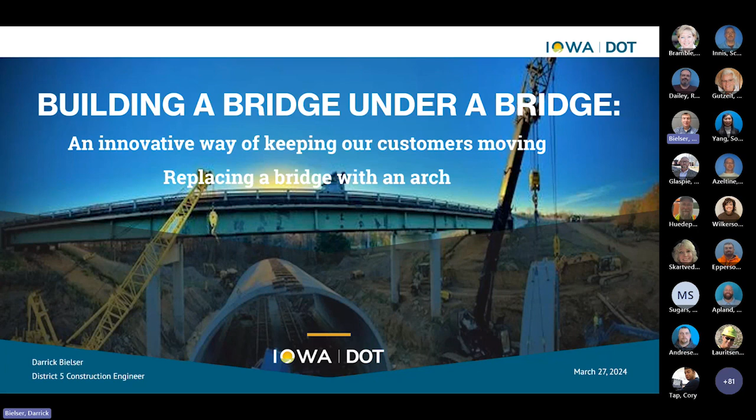Hello, I am Darrick Bielser, and I'm here to talk to you today about building a bridge under a bridge, an innovative way of keeping our customers moving.

Innovation in construction: while maintaining safety, innovation can increase mobility in order to keep our customers moving. I'm going to talk to you about a bridge replacement project using an arch on Iowa 1 over Little Lick Creek in Van Buren County. Van Buren County is located in southeast Iowa, just south of the Fairfield District Office. Today's agenda will include concept, design, fabrication, construction, leaving time for questions.

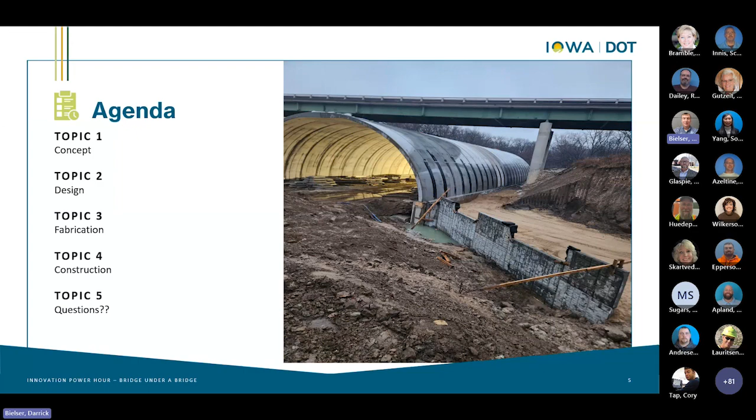Iowa 1 is classified as an area development route with a C maintenance service level, 24-foot wide PCC pavement with granular shoulders. An HMA resurfacing project with paved shoulders was completed in 2004. The 2022 AADT was 2,500 vehicles per day with 9% truck traffic.

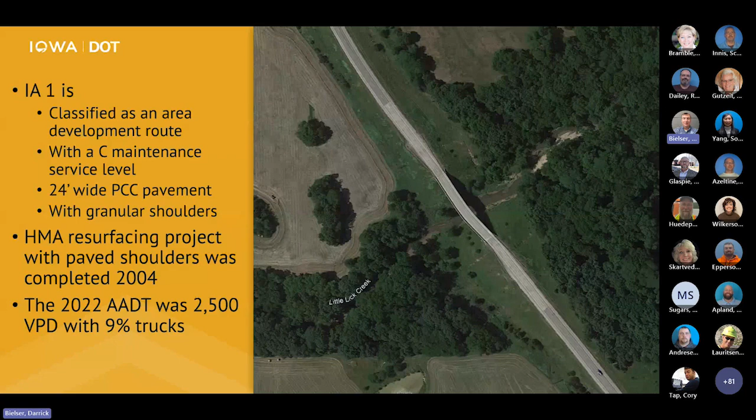The crash report from January 1st, 2014 to December 31st of 2023 indicated there have been 3 crashes: 0 fatalities, 0 personal injury crashes, 1 animal hit, 1 operating vehicle in a reckless manner, and 1 vehicle ran off the road to the right.

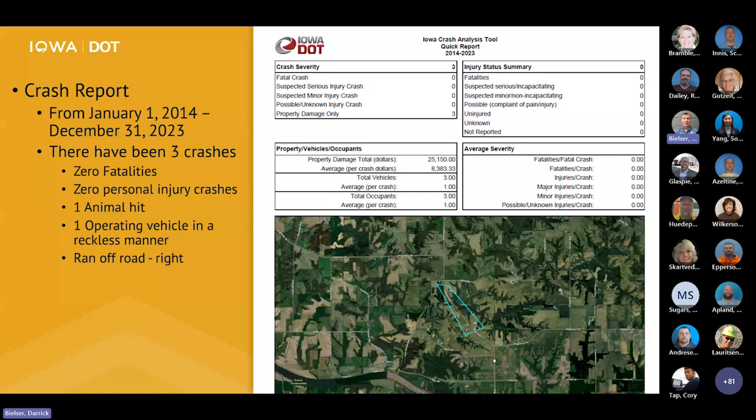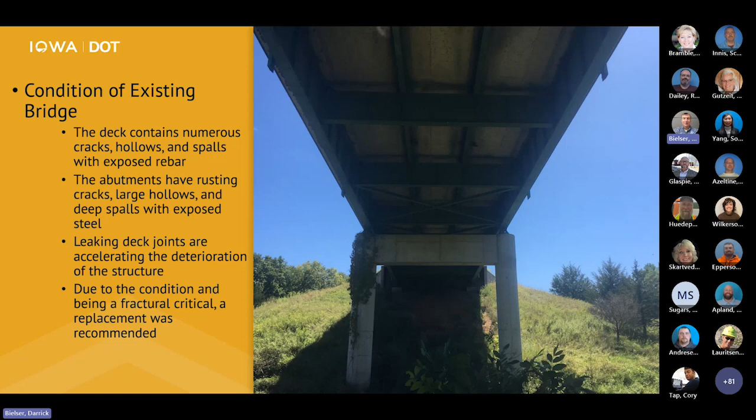The existing bridge is a 240-foot by 30-foot welded plate steel girder fracture critical structure built in 1967. A bridge deck overlay project occurred in 1992. Conditions of the existing bridge: the deck contains numerous cracks, hollows, and spalls with exposed rebar. The abutments have rusting cracks, large hollows, and deep spalls with exposed steel. Leaking deck joints are accelerating the deterioration of the structure. Due to the condition and being fracture critical, a replacement was recommended.

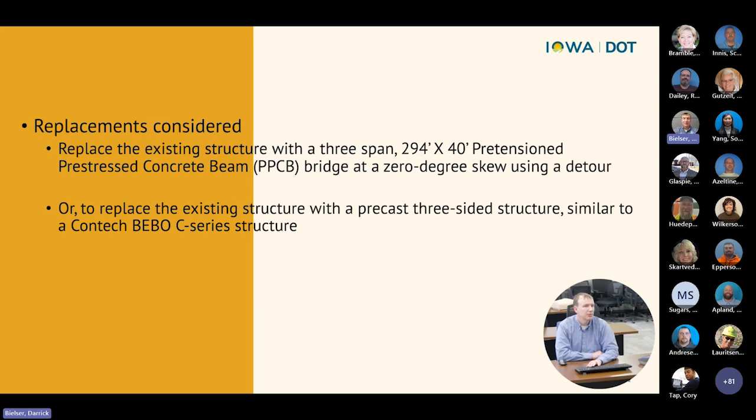Replacements considered: replace the existing structure with a 3-span, 294-foot by 40-foot pre-tension, pre-stressed concrete beam bridge at a 0-degree skew using a detour, or replace the existing structure with a precast 3-sided structure similar to a Contech BEBO C-series structure.

If option 1 was selected, project estimated total was $3.2 million plus the anticipated detour costs. Iowa 1 would be closed and an off-site detour would be utilized. It was anticipated the detour would be in place for approximately 165 days. The out of distance travel is 12 miles. The total distance user cost was anticipated to be $730,000, which equates to over $4,000 per day. With an AADT of 2,500, this equates to $1.77 per user per day, plus the additional time associated with driving the 12 miles.

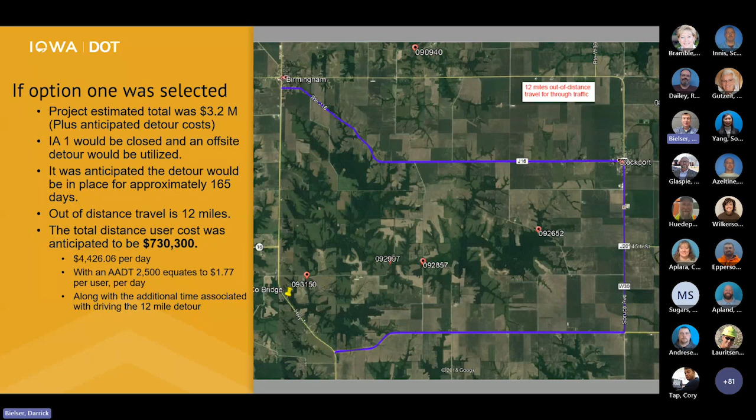If option 2 was selected, the project estimated total was $3.8 million. Traffic on Iowa 1 would be maintained at all times. New precast three-sided structure could be built under the existing bridge without disturbing the bridge. After the precast structure has been placed, flooded granular backfill and flowable mortar would be used to fill the voids between the precast structure and the existing bridge.

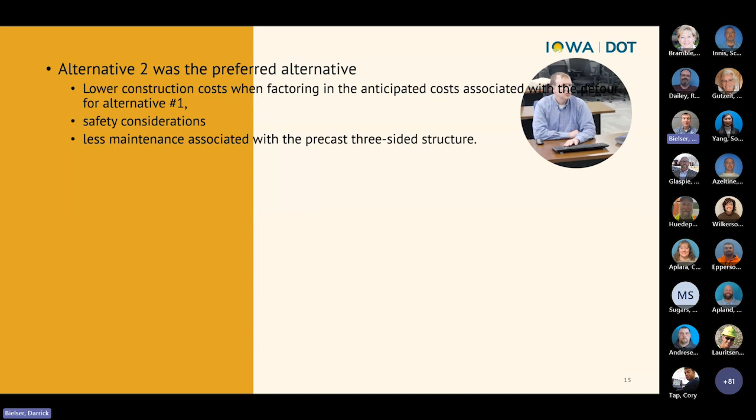Alternative 2 was the preferred alternative, due to lower project cost when factoring in the anticipated detour, safety considerations, and less maintenance associated with the three-sided structure. Based on the hydraulic analysis, a culvert was not an option for this location, so no culvert options were reviewed. Other alternatives discussed included a runaround option, stage construction, and accelerated bridge construction. A runaround was dismissed due to the topography. The ABC option would be more expensive and complicated, and the stage construction was also ruled out.

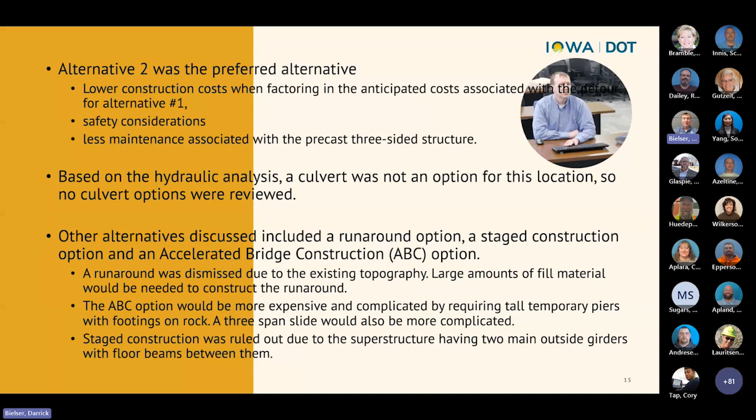Once the Bebo C series was selected, the appropriate size needed to be determined.

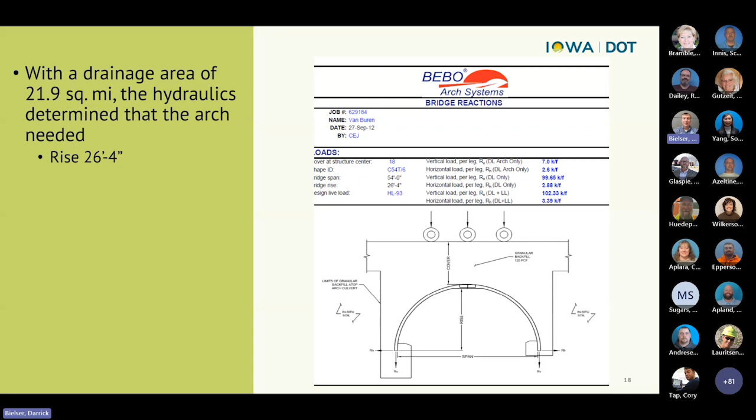With a drainage area of 21.9 square miles, the hydraulics determined that the arch needed to have a rise of 26 feet 4 inches, a span of 54 feet, 18 inches of cover at the center of the structure, and be 144 feet long.

Based on the size requirements, a twin leaf sectional C54T/6 was needed.

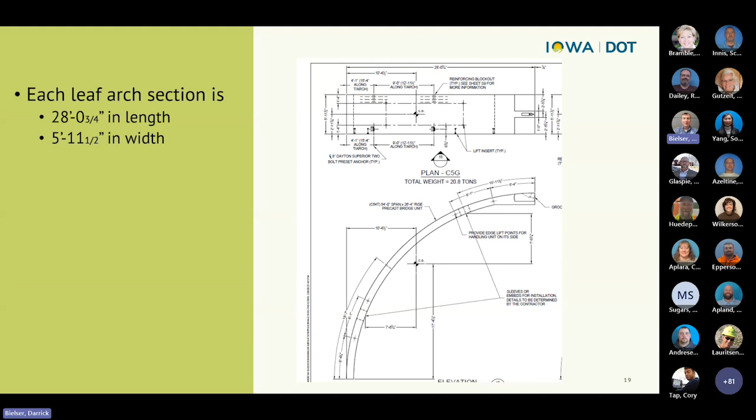Each leaf section is over 28 feet in length, almost 6 feet wide, and weighs 20.8 tons. They were delivered one at a time, connected together with a piece of all-thread rod during installation, later bonded permanently with a concrete pour.

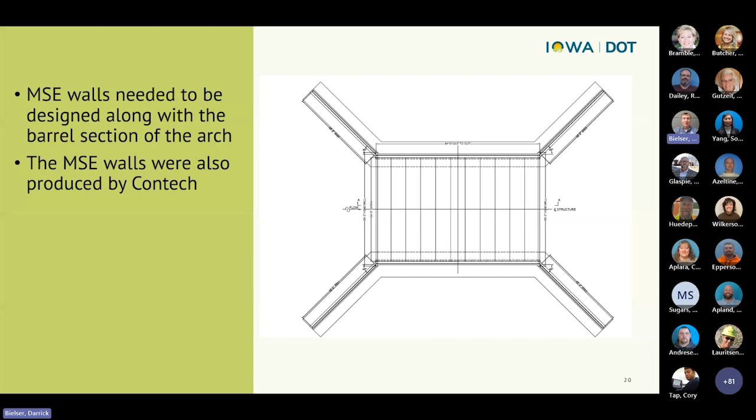The MSE walls needed to be designed along with the barrel section of the arch. The MSE walls were also produced by Contech.

Terracon performed the site investigation. Based on the review, they recommended the arch culvert be supported on a spread footing foundation bearing on the underlying limestone bedrock, which is shown here.

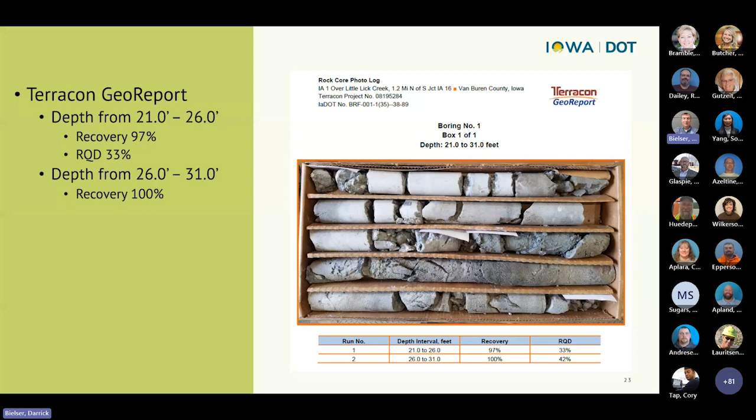Terracon's geo report of the rock core from the depth of 21 feet to 26 feet had a 97% recovery, but the RQD was 33%. From 26 feet to 31 feet, the recovery was 100% and the RQD was 42%.

Once completed, the barrier rails will be removed, foreslopes will be in place, granular backfill will be held back with the MSE walls, and the traveling public will drive over the arch without their awareness.

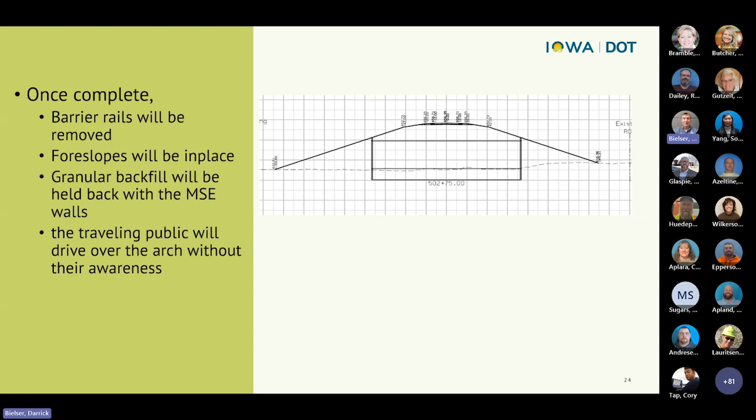From this point on, I'm going to enlist the help of some additional people. The first of which is Matt Rasmussen.

Matt is a senior bridge engineer with Schemmer Associates. He obtained his bachelor's in civil engineering and master's in structural mechanics and materials from the University of Iowa. He has 16 years of bridge design and rating experience, from design and ratings of small reinforced concrete box culverts to large variable depth steel girder and pre-stressed concrete structures at river crossings and urban interchanges.

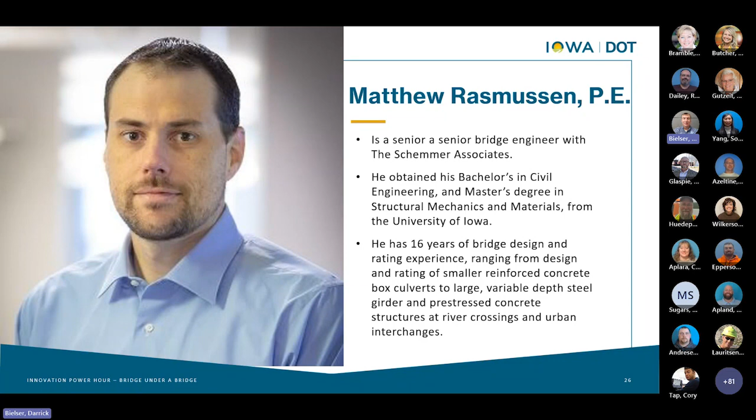During our conversation, Matt was asked to discuss challenges encountered, design focus, and why a big box culvert thing would not have worked. The biggest challenge was the proximity to bedrock and then the unknown aspect of exactly where it was, because the original structure drawings indicated the bedrock was at a different elevation than the borings indicated.

So not only did we need to design the footings for a long stretch of bedrock, but we also had to build in some conservatism so that it could be adjusted in the field by 6 inches or so and not have an issue.

And then also provisions for having the contractor verify the rock before they built. And of course, in this case, it turns out that the rock was variable beyond even what the borings showed for confirmation. So that was probably the biggest challenge.

So your main focus was on the stems from the bedrock up? Yep, from the bedrock up, and then making sure there were provisions in place for potential construction issues so those could be solved. And then also the MSE walls, since that is not a typical thing to have in a floodway.

The big issue we had there was working with the district personnel, with you guys, and then also the Construction Materials Bureau to see what sort of details they wanted to make sure it was going to last a lot longer, despite the fact that it was going to be a flooded MSE wall. So there was a lot more effort than you would normally think put into detailing and materials and specs to make sure everything that Iowa has in their normal specs would work for this situation as well.

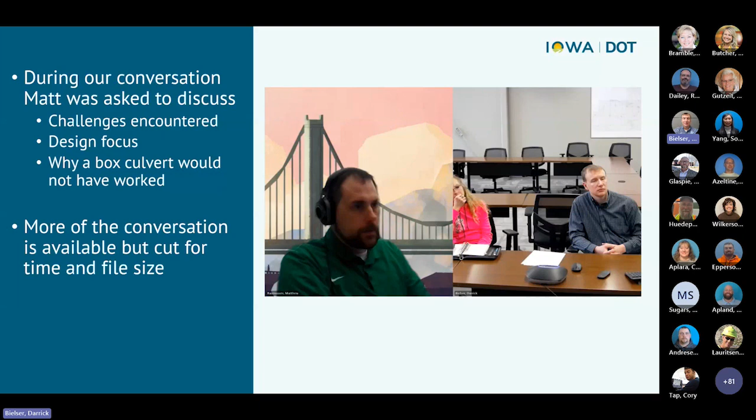Absolutely. Next up is Jake Vogel.

Jake is a senior bridge consultant for Contech Engineered Solutions out of Shakopee, Minnesota. He's worked on numerous projects in Colorado, Minnesota, Iowa, and many other states across the U.S. He received his Bachelor of Science in Engineering in 1999 from the South Dakota School of Mines and Technology in Rapid City, South Dakota. Jake is active in Minnesota Society of Engineers and Surveyors, as well as Minnesota and Iowa County Engineers organizations.

And then we have Travis Augustyn with Progressive Structures, the prime on the project.

Progressive Structures was established in August of 2010 by Travis Augustyn and John Moyna. The company was started to better satisfy the demand for underground and structural projects. Moyna has been in the construction industry for 30 plus years with experience in a vast array of underground projects. Travis began operating the company after graduating from the University of Northern Iowa with a degree in construction management.

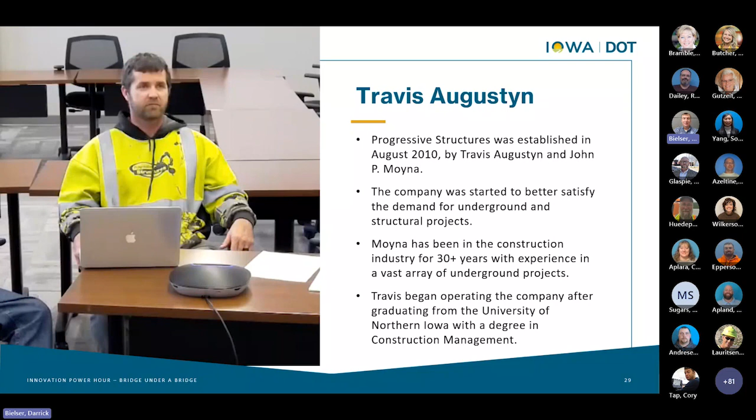How do we talk about a project that's as complex as this? Where do we start, right? I think that's on everybody's mind.

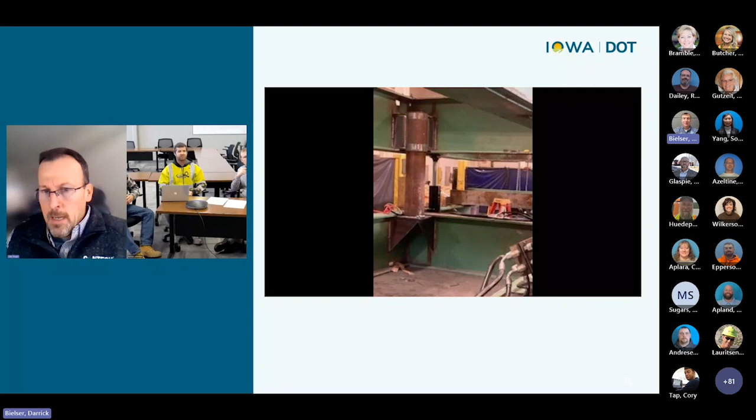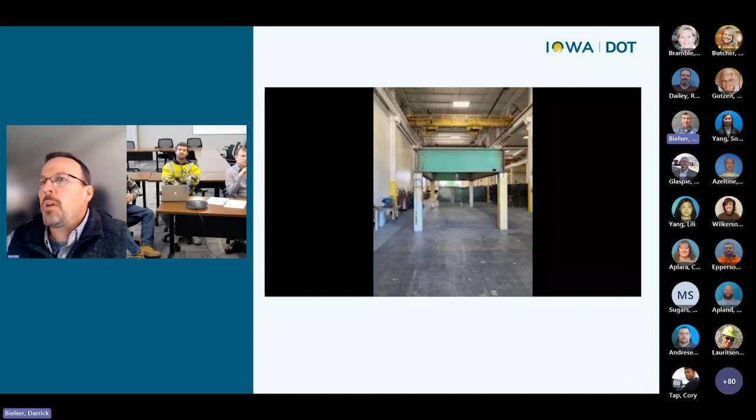At Contech, we do a fair amount of consultation with consultants that we work with in the transportation and heavy highway markets. A lot of times when they get a project like this, it's a pretty unique challenge. This site in particular, as anybody watching is probably going to see in the photos and videos, it's a deep ravine. The bridge is a long ways up from where the flow line of the creek is. These are the types of projects where we get calls from consultants, and they were originally thinking, well, maybe a bridge, but then they start looking at what the detour plan would have to look like, and that's a pretty big undertaking.

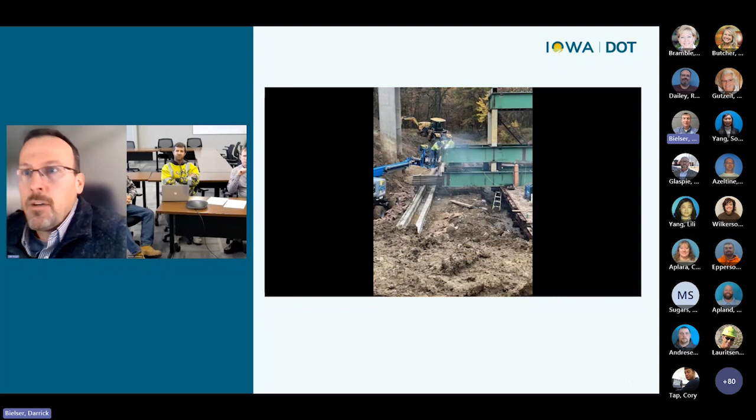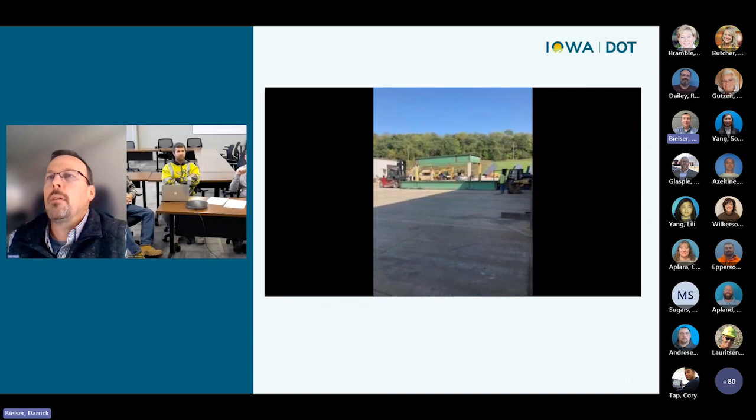So knowing that in mind, Shive Hattery, who did the prelim design, came to us and said, hey, we're actually considering doing some kind of buried structure and having it stay under the structure, building it underneath the existing bridge so we can keep the bridge in service while we construct a new structure below it. Knowing how much vertical height we were dealing with, I think this was a challenge where Shive Hattery realized they probably ought to check around a little bit and see who does structures that are not only large enough to handle the flow capacity, but also deal with the high amount of overburden.

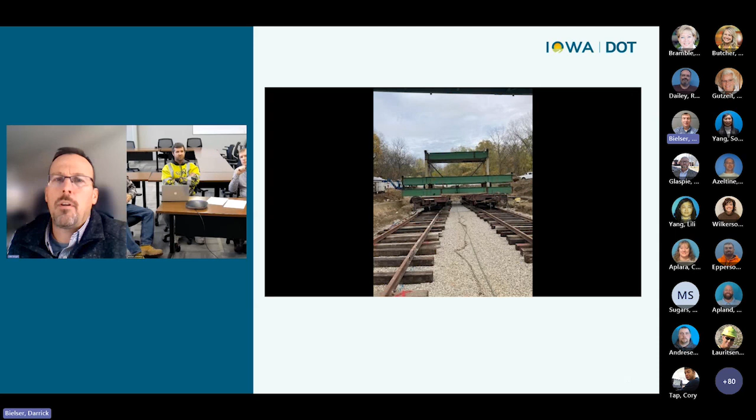There's just not a whole lot of technologies out there, and as a manufacturer, we do have a few different types. So at the very onset, we did talk to Shive Hattery about some metal options. But given the amount of fill, it kind of got outside of the realm of what a lot of metal options could handle, and maybe a little more challenging from a cover standpoint too.

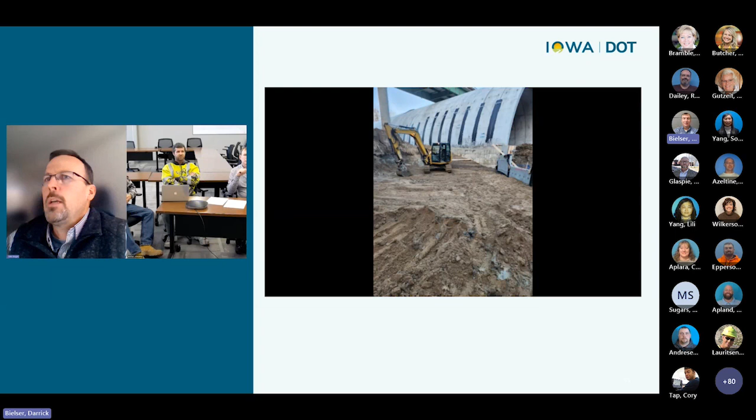But we do make a precast arch system called a Bebo system, which looks more like a conventional arch system. Sometimes the DOT folks, especially Iowa DOT, are familiar with our three-sided concrete arches, or what we'd call our conspans, which are more of a squatty, flat arch top with vertical sidewalls, which we've certainly supplied on state jobs.

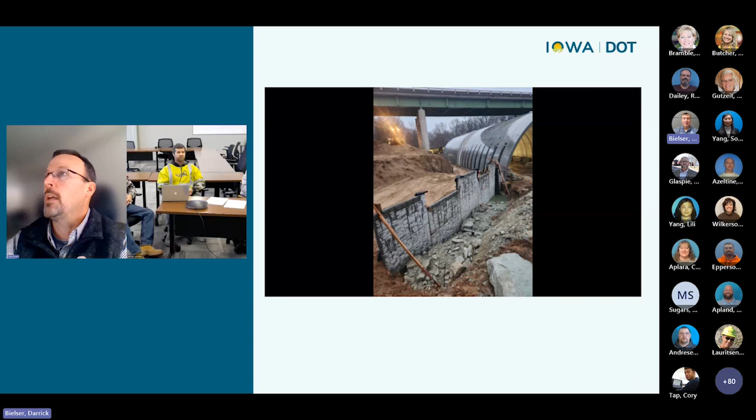But when you have a high amount of overburden, a lot of times you need to pick a structure that acts more like a true arch, that can actually shed load out to the backfill when it's feeling all that load from the overburden. So that's really how the discussion started with Shive Hattery.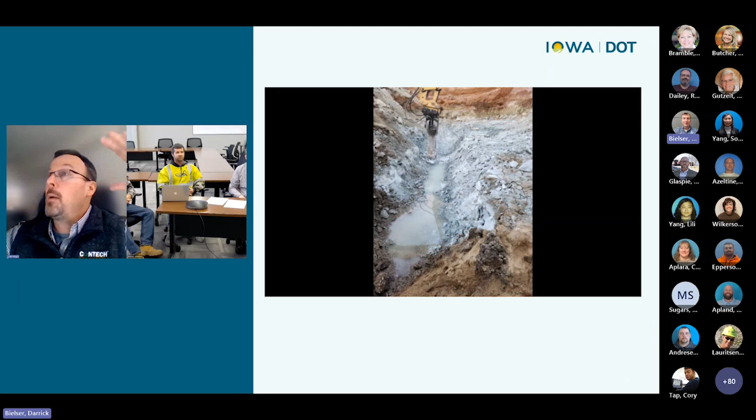We sort of went back and forth on the options, how much fill could be accommodated, different scenarios, and keeping in mind the whole time too that Shive Hattery did have the ability to possibly make the arch rise up in overall height by making a stem wall taller. So those were some of the considerations.

All the while, we're providing some preliminary loads and reactions for them to see what that might look like, so they could hand it off to final design. So we did a lot of upfront assistance with them, and they laid a lot of different things out from the hydraulic standpoint to lay out what structures might work.

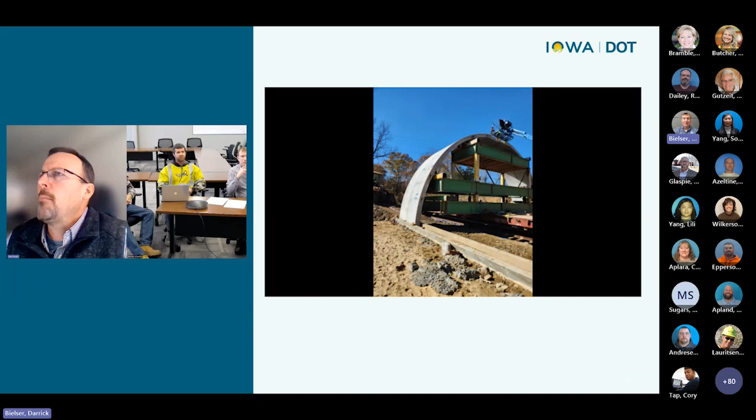So the structure selection was pretty robust, going back and forth, looking at different sizes, span and rise combinations, how they might utilize the stem walls, different things like that. So we did start to get to a point where we had dialed in the arch size that seemed to make the most amount of sense.

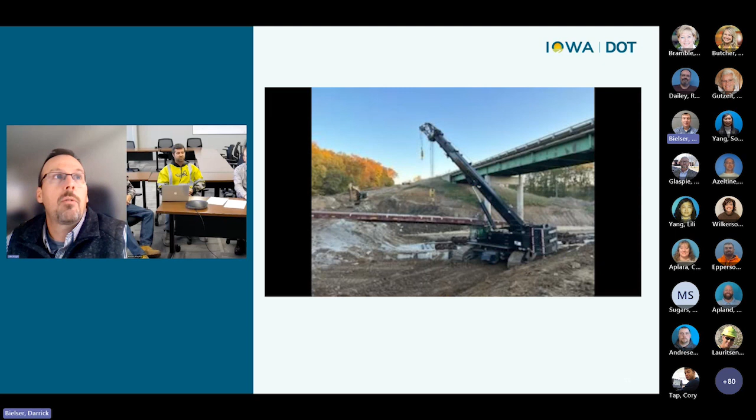And of course, that was the final arch size, which ended up being the 54-foot clear span structure, and about a 26-foot rise, a little bit over 26. So you think about those dimensions, it's almost a true arch, right? The span is basically twice the amount of rise. So it's a very efficient shape structurally. That's, I think, how we kind of honed in on that.

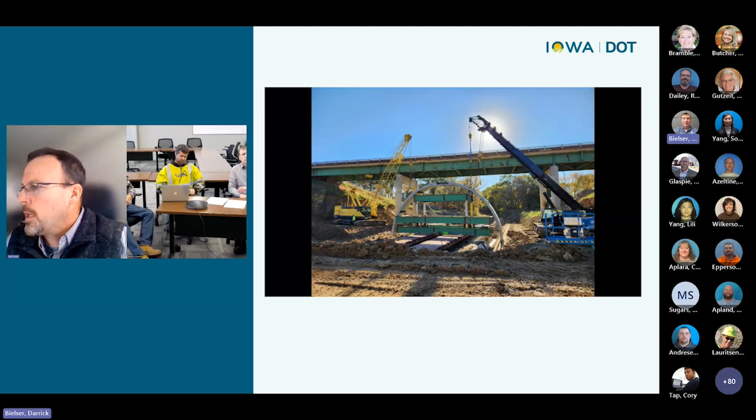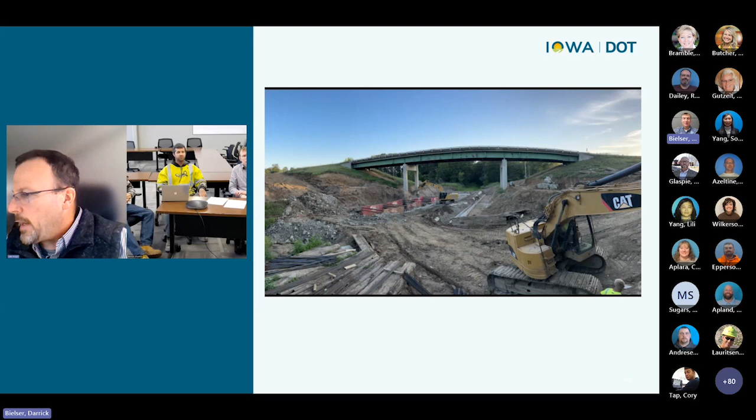Along the way too, we might have provided them some user-defined coordinates to help them model it, because not everything you find in the hydraulic programs is always what's available. And sometimes many of the things they show in the HEC-RAS models of the world don't always reflect what actually can be built either. So there was quite a bit of back and forth there. I guess, fast forwarding to bullet point number 2.

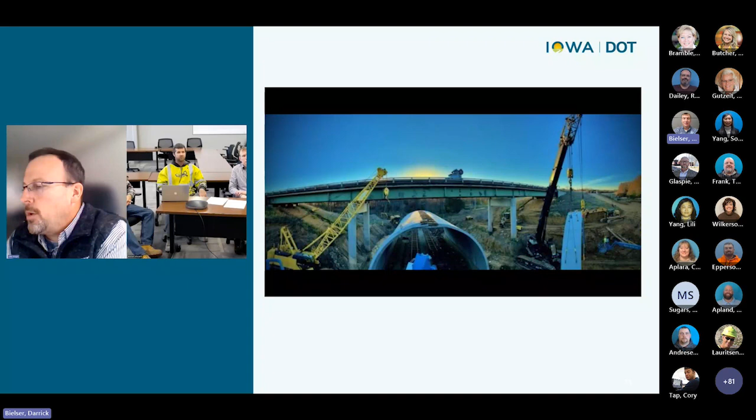I mean, what were we? Gosh, I want to say we were 144 feet. Yeah, 140. You can, if you mess up even a little bit, you can be so off in your alignment in one piece, in two piece, and on a 54-foot span arch, that's not easy to bring it back into tolerance.

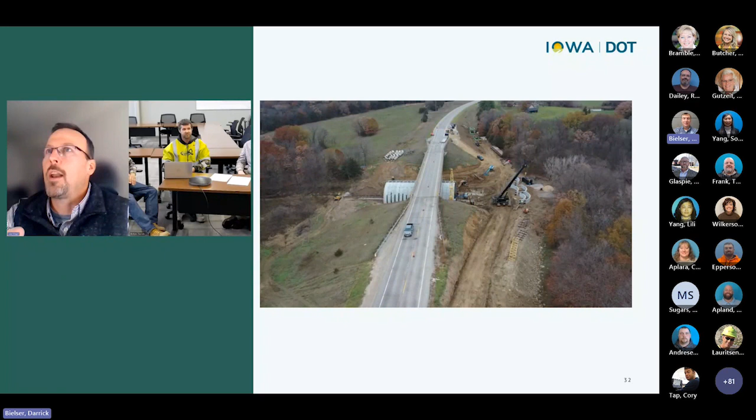So every piece that you put in, you've really got to be cognizant of those tolerances. That's why it's so important to make sure, if you're going to be very close to that, take it up to the tolerance, you got to absolutely make sure you've got your plan ready for the next piece.

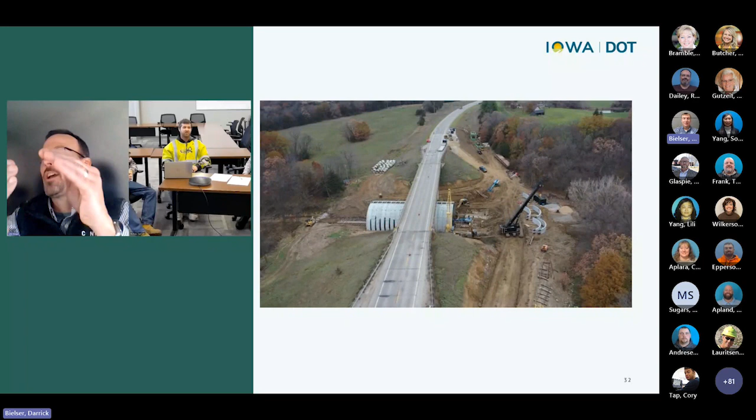To your point, one of the things that's hard for people to visualize is when you had your falsework in there, it is basically like a splint that's kind of holding them into place. When you pick them with individual cranes, the center of gravity on those precast pieces is wonky. You have these two objects that are just kind of floating around in space, and they're not just sitting perfectly where you need to set them down in the keyway and everything.

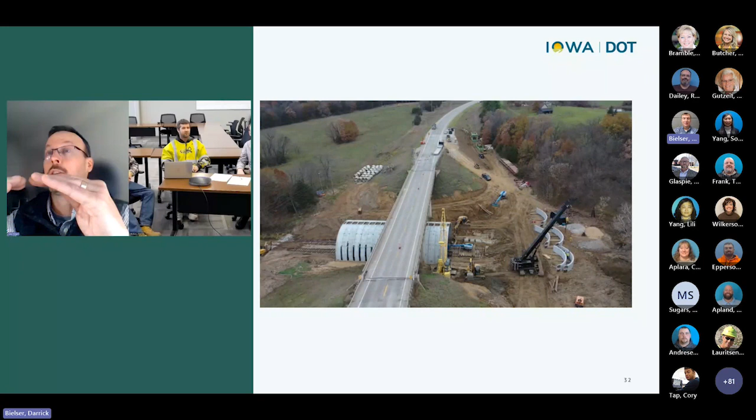So when you say it was easier to do it with your falsework, I would believe it, because you're controlling the amount of movement that arch can have, and then you're actually using the jacks. You're actually able to manipulate the movement the way you want it to. But that's a little more difficult to do with the cranes, because they're just kind of free flowing in the air, and there's a lot of tweaking that has to happen to get them right.

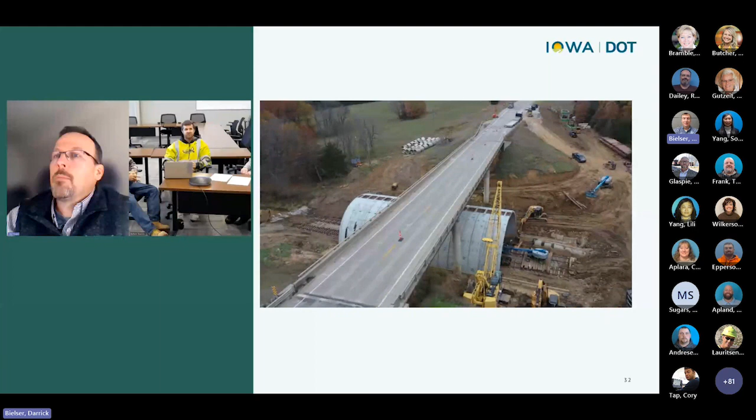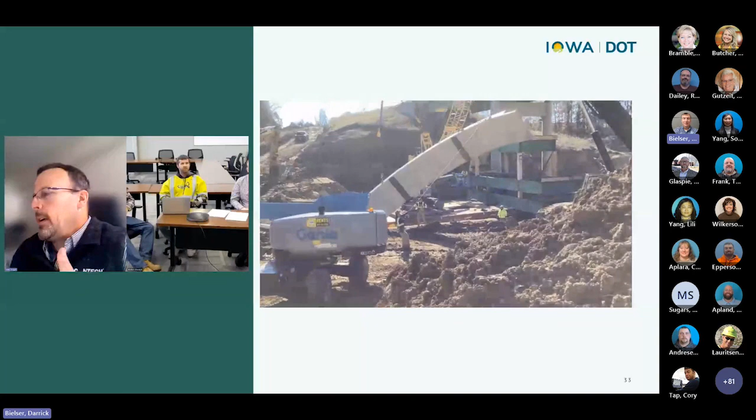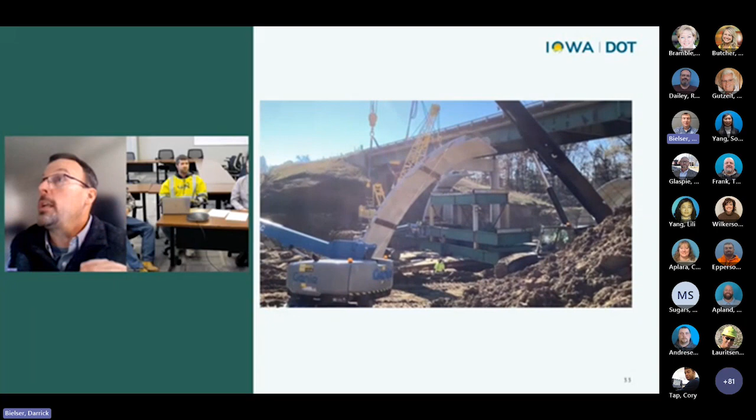We had to get kind of creative with Travis too on the arches. One of the things that we've glossed over a little bit here is that when we were originally talking to Schemmer and Shive-Hattery, there wasn't a whole lot of discussion about the arch being a two-piece at this span. At a 54-foot span, our arch comes in two pieces, as was witnessed there in the photos. So not knowing that, a designer might look at that and think, oh, the whole thing's getting pulled in as one time, or getting pushed in underneath the bridge.

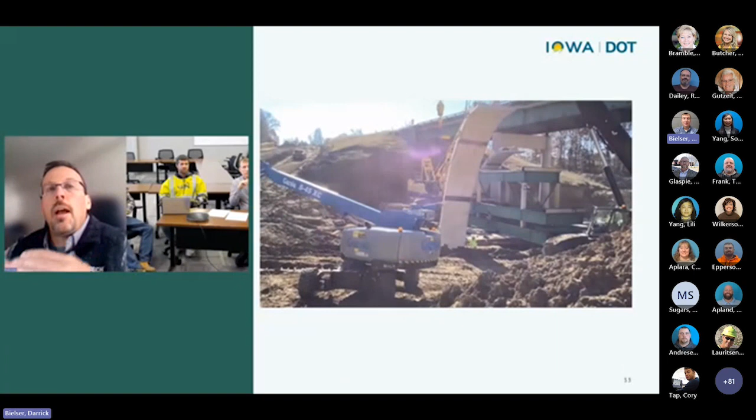And we certainly have precast arches that do that, but unfortunately they end at about 45 foot in clear span. So the structure we had here was actually what we call a twin leaf BEBO, and it had a crown joint in the top of it, and you can definitely see those in the photos. So what makes that unique is Travis had to come up with a rigging system to be able to hold those two halves together. We do have an alignment rod.

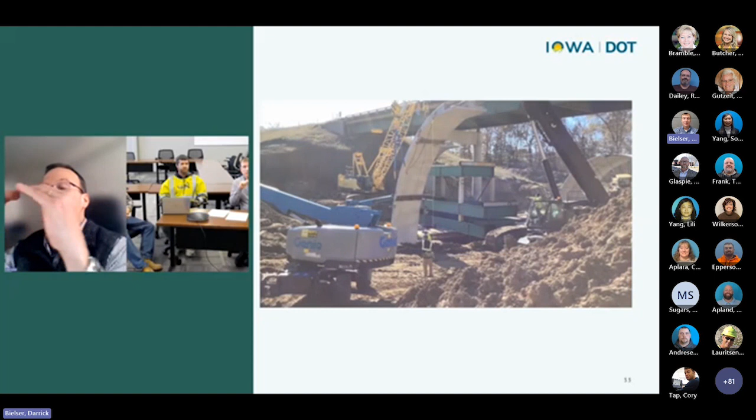It's basically a piece of all thread that is merely something to just kind of hold them in place during the closure pour on the top. But that all thread rod doesn't have enough strength to hold these two arches together independently while they're pushed. So basically, at a very high level, what Travis had to do, and we had to incorporate this in our shop drawings, is we had to find a way to almost immobilize the halves and hold them together in something that would not allow those two halves to move independently.

When we show his photos of kind of his splint or his rigging to do this, it was a little bit of give and take, and we actually had to add some extra steel into our normal arches above and beyond what they would normally use, to make sure there would be some extra beef in the areas where he would be grabbing our arches, or basically at our pick points.

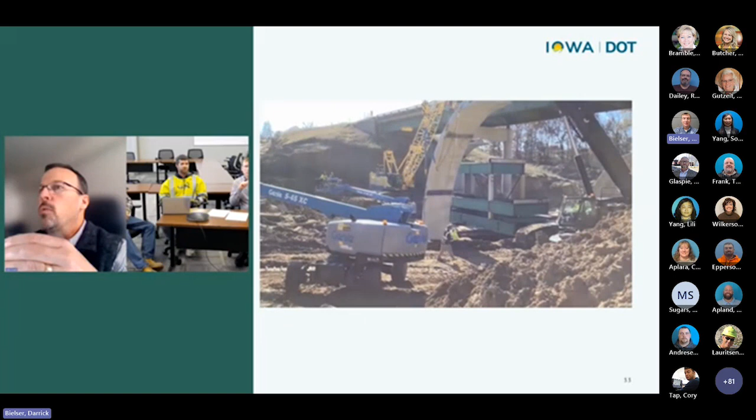Keeping in mind that the ideal situation for him to grab our arches would be in areas where they were intended to have lift points when they're lifted off the trucks. So that's how he, in a roundabout sort of way, figured out how he was going to grab them and mobilize them—he worked around where our typical pick points would be, and came up with kind of a rough rigging plan for how to do that.

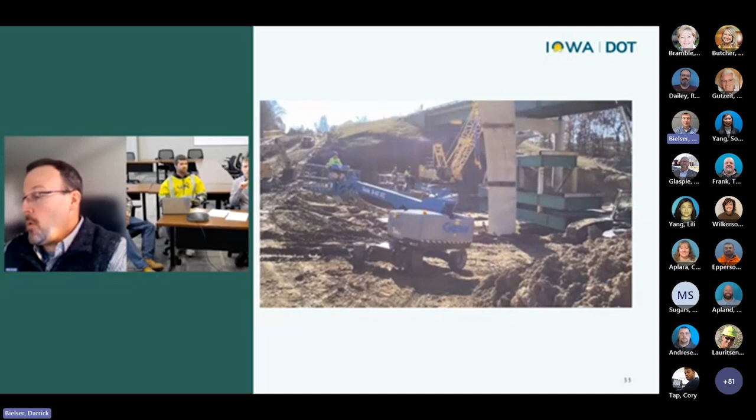So I don't know if at this point in time, Travis, we want to start talking about the rigging and how that tied in, because it certainly was a work in progress. We almost had to break it down and pull it apart to figure out how to put it all together. That is a good segue into, Travis, how did you come up with that framework?

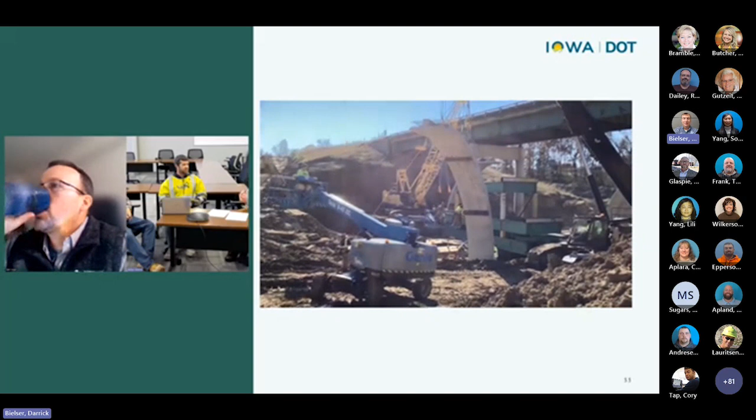You kind of knew how big the arch was going to be from the submittal and the shop drawings, but from the plan, how did you develop the size, and where did the railroad tracks come from?

Well, it all kind of came over multiple conference calls, discussions, and meetings. It really started to come into place. This thing bid like November, the season before, I think is what it was.

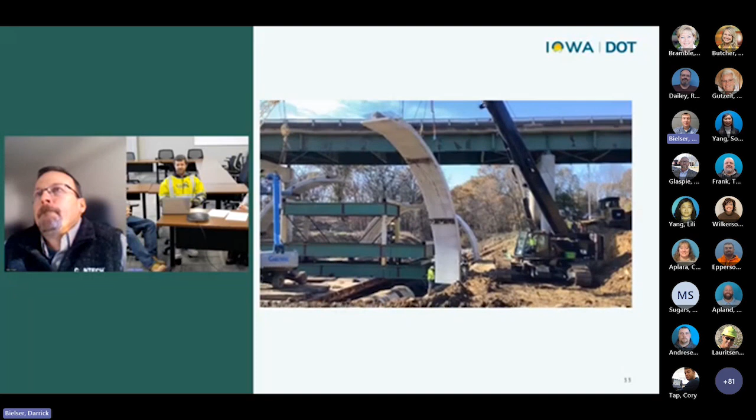Jake kind of humored me earlier about an hour ago. We were talking about how he thought I had a fairly developed idea, but I was thinking back to when it bid, and my idea was nowhere near what it actually ended up being.

Actually, our original plan was to make something like what we were doing with a couple of 352 excavators without a stick on them, but the amount of weight and sheer leverage that those things would have had, it would not have worked. But that was kind of the plan originally.

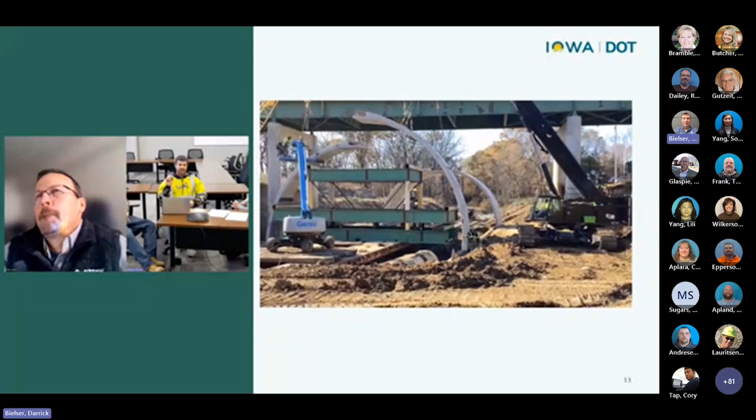I probably had about 3 conference calls with Contech that were a little bit tough, because every time they've installed them, it's been an open cut. There's a crane over here, there's a crane over here, and you just put them in conventionally.

Everyone was very concerned because these things are over $1 million in material. And that's how it's typically done, is they're just putting in place, and then you move on. The bridge wouldn't have been there. So you could have run 2 cranes on swap mats and put them together.

Everyone was very concerned about all this discussion and design, all this discussion and submittals, a lot of front end work just to make sure that it works and is successful, because it's just as important for me, the contractor, to get them installed as it is for Contech as the designer.

So we had a lot of meetings where it was like, no, that's not going to work, or no, you can't have the crown bolt in, or no, you can't do this. It was kind of frustrating at points, but I understand everyone was just trying to make sure we didn't have a problem.

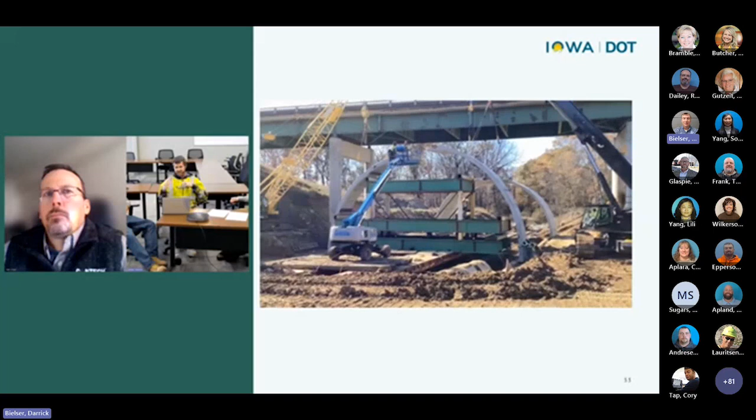But they kind of brought some stuff to the table. By they, I mean Jake, and there was probably 3 or 4 different guys at Contech that were on these meetings. And then I had an individual doing some drawing who had some ideas too. We had multiple meetings and started to go in the direction of needing some sort of deal where we can slide these things into place.

Originally we were going to build the whole undercarriage just from the ground up, and we kind of drew it up. Originally there was like these little 8-inch wheels, like casters.

When we drew them up, we had these 36-inch I-beams drawn in there that looked huge, and then these little 8-inch wheels, and it just looked like a bad idea. So then I got to thinking, why don't we just get some rail cars? That's the whole bottom end, we'll just build off those.

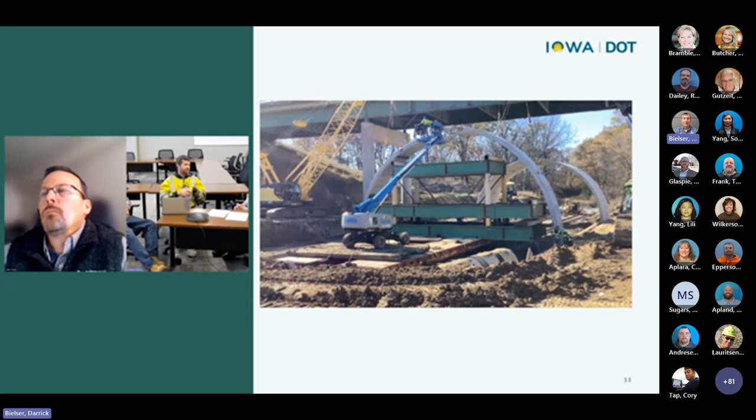They're very heavy duty, very resilient. People use them for a lot of heavy weight, as far as running on the rail and stuff like that. So we kind of started to go that direction, and we kept all the false work above that the same with the hydraulics we started to draw. We just put rail cars in there instead.

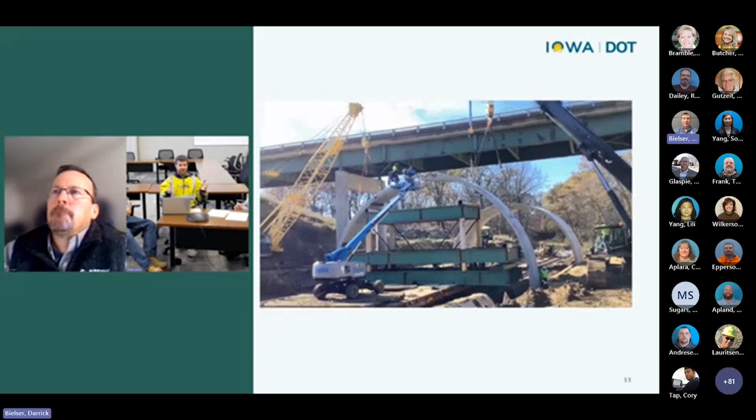We got some conceptual things drawn up, and then it really took shape a whole lot, I would say, when we started actually building it. We drew up a few things, had a few meetings so everyone had an idea of what we were trying to do.

And then we got the arches approved. We made a plan to get Weiser to build them. The big thing was get these first two built, get these first two to Elkader.

We're going to physically put them here and take measurements with them mocked up, laying on the ground at 90 degrees of the way they sit, so we can make sure what we're building fits right into them, versus hauling all these 6 semi-loads of stuff that are 90-foot long loads, really unconventional things to get down there, let alone getting them from the top of the hill to the bottom of the hill down into the creek. So we wanted to make sure we weren't making a ton of adjustments in the field.

So we actually mocked up the whole thing in Elkader, at CJ Moyna and Sons, where they built all this. But doing an arch on the ground would be different than doing an arch in the air with the weight of it bringing it down, right?

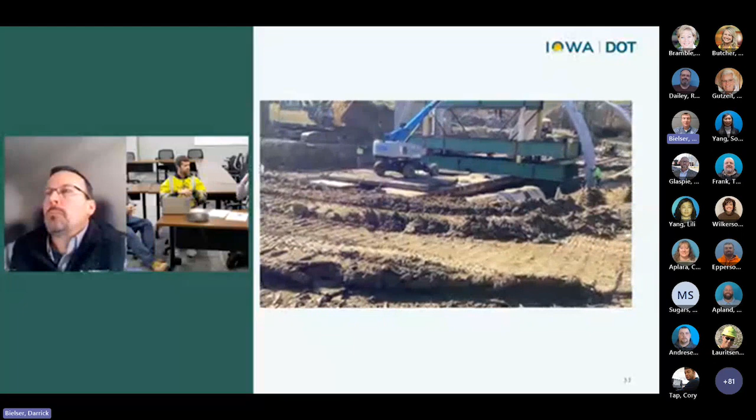Yeah, sure, worried about that a little bit, that there's going to be some deflection and stuff. And we did have to make some adjustments in the field. I think we just had some measurements off. So once we actually got everything in the field, we put the 2 arches up and went to run the hydraulics up. We basically hit, and then we were out of lift, so we couldn't get it up off the ground.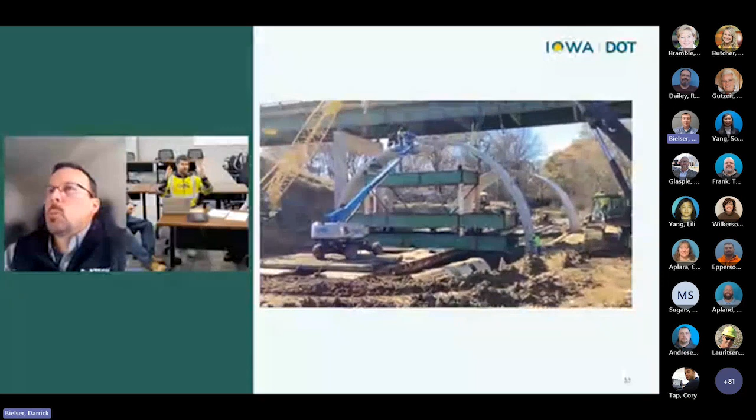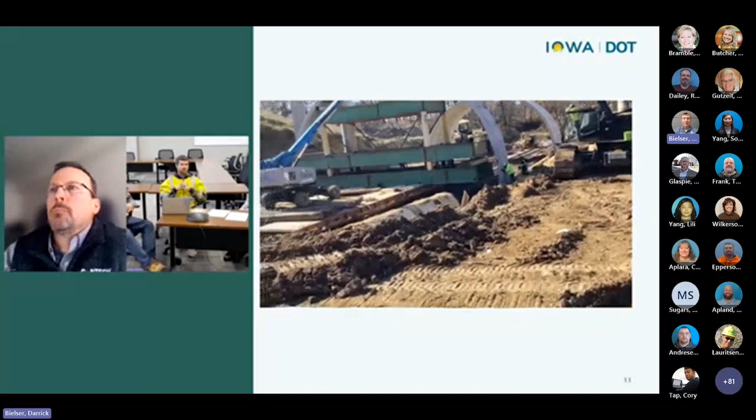So what we ended up doing is we put some big 12-inch by 12-inch beams in there, put our channels on top of those. We also made our channels adjustable, whereas they were just welded on there before, which we had to do because each arch fit just a little bit different. We had to make some little adjustments every time we picked up to launch those arches in there. But I think it was really important setting all that up in Elkader and doing that.

There's a lot of measuring and a lot of stuff to do there. But all the false work really didn't take off until we actually had these things, because we've done stuff kind of like this, but not like this in scope and size and everything. It's hard to visualize how big everything is.

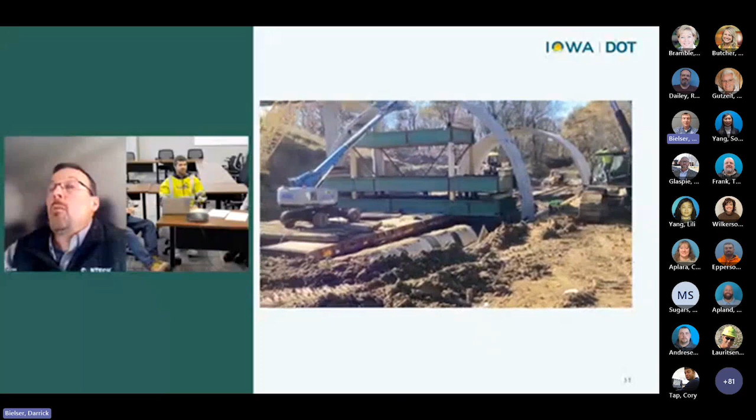I don't think anyone has ever done an arch this size under an existing bridge with live traffic. We've done close, but not the 2-piece.

Again, I think what made this one extra challenging, and Travis hit the nail on the head, was when our engineers were talking to him and one of his mechanical guys who was helping him with drawings and sketches and everything, we almost didn't know what questions to ask. We didn't know what we didn't know. We just knew, first of all, this is a big arch.

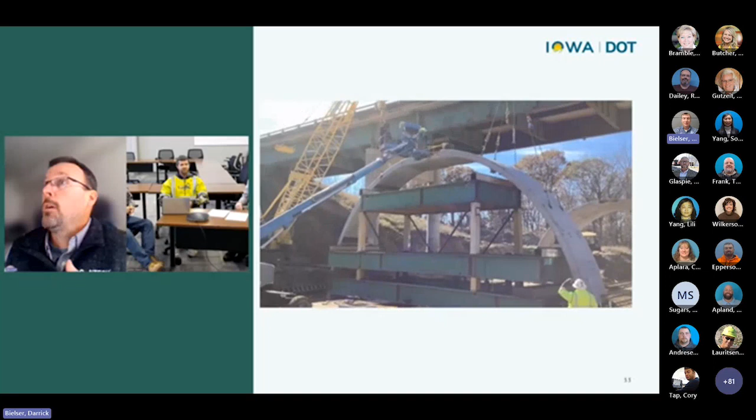We got to make sure whatever we do somehow keeps it immobile and it's safe. You got two really big slender pieces of concrete out there that if we don't figure out how to get it right away from the job site and we just go out there without a good plan put together, somebody could get hurt, or we're going to do future damage to the bridge.

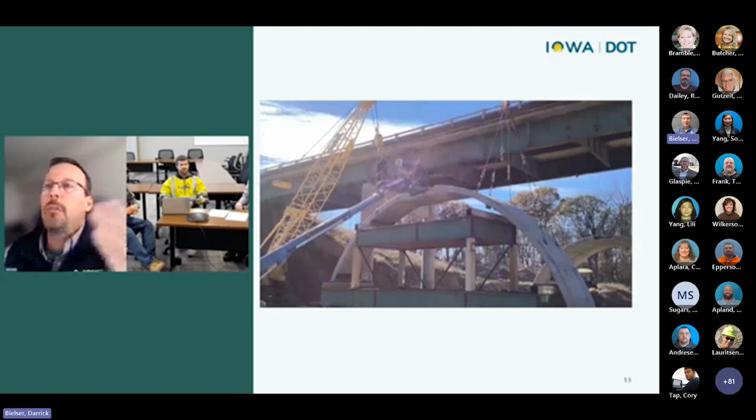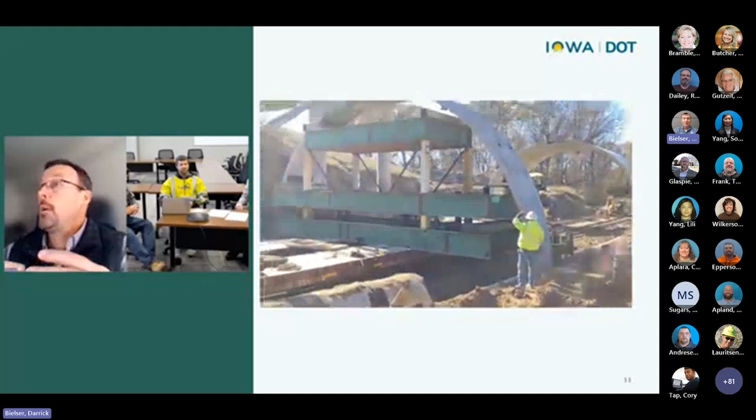So the concept of being able to lift the whole thing into place also had to be able to lift it up into place over the footing, and then it also had to be able to lower it back down onto the shims, because the arches, in order to make sure we have equal loading on the bottom, we put it on a shim pack so they're not touching, because no contractor, no offense Travis, is perfect when it comes to pouring concrete. So we use shims to give us a surface that once it's filled with grout and concrete in there, the leg is evenly supported the whole way.

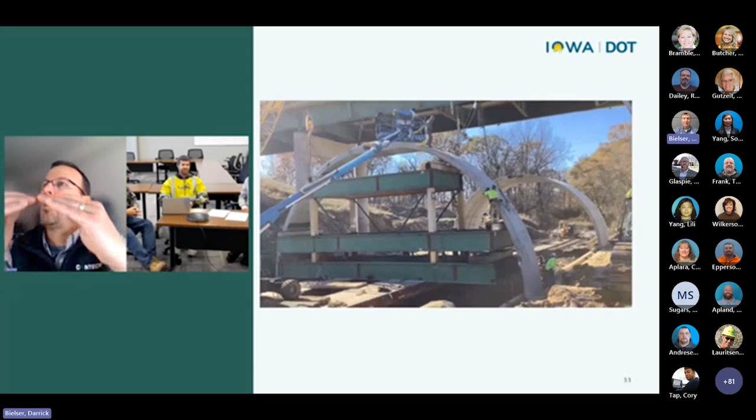But that means you do need to lift the arch up all at one time, both leaves at the same time, and then set it back down. So the only way Travis could really have the confidence to do this is we got to mock this up in Elkader.

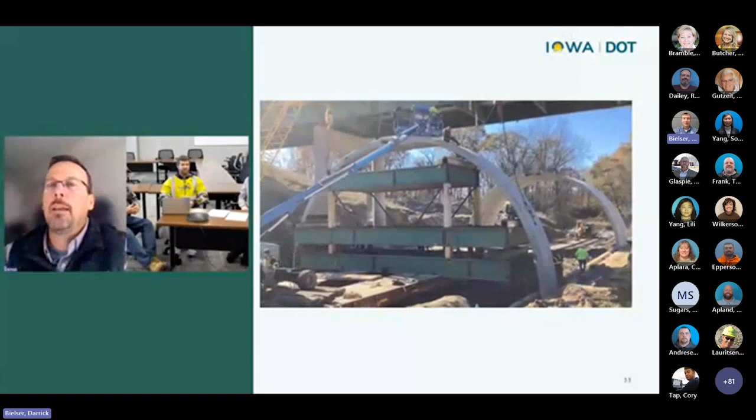We sent out the arches early so he could get those finer points worked out. And I went down to Elkader and looked at it, and it was kind of funny. He was explaining it to me over the phone, and I had no idea what he was talking about. He's trying to send me some sketch and everything, and then I get out there and the light bulb goes on. Oh, this is what you mean now when you're putting these together. It was one of those things you almost really need to get your hands on it and see it and feel it, how it worked and everything.

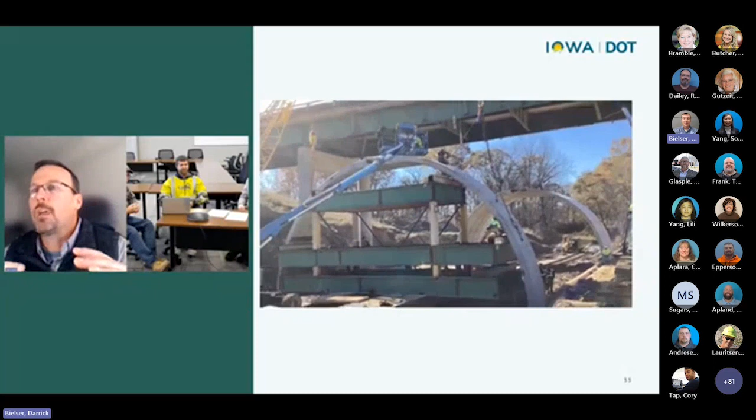Now, that's not to say we didn't have some bumps and bruises with the fine tuning and everything, but this was very big. Down at the job site, it doesn't look that big when you're in the parking lot in Elkader, but you look at that, and I kept telling Travis, this looks like the Taj Mahal of steel I-beams. And then you're setting the Taj Mahal of steel I-beams right on top of the flatbed rail car.

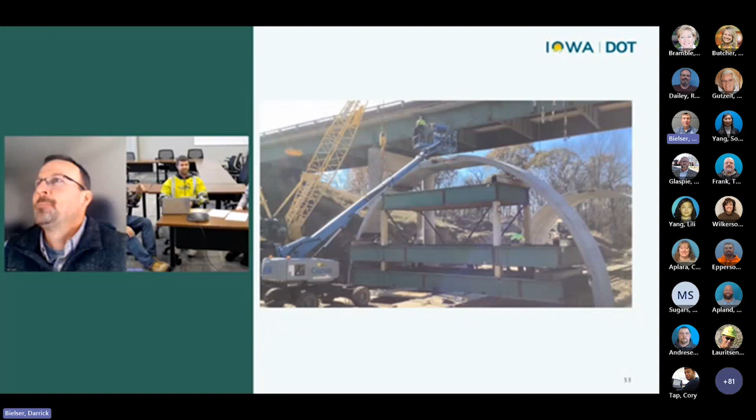We might fast forward a little bit on the lessons learned. One of the things I probably would have done differently, and I'm sure Travis would have too, is we probably would have waited to design the MSE wall until he was out there looking at it. We found this competent bedrock. And maybe even a better way to approach that would have been to have the exploration done ahead of time, then we could have had everything dialed in, and Schemmer wouldn't have had to redesign the elevations, the steps, the footings, and we wouldn't have had to redesign the wall. It just probably would have made it a little cleaner and easier for all the parties involved.

But again, we all got through it. The math on, say, the 4 hydraulic cylinders, those things were all calculated. They were supposed to be able to pick up like 600,000 pounds. And obviously with the I-beams, we had to make sure the cantilever that was hanging off wouldn't have too much deflection. So there was a lot of math and engineering that went into it, and for me it was a big learning curve figuring all that stuff out, so we weren't figuring out in the field that it didn't work and that we should have thought of it.

Travis, a quick point too that's a really big part of this, is it was more than just raising it and lowering into point. You had to get the formwork back out of there to go get the next arches too. And that's why he had those doors in there, so you could go in, put the arch in, and then be able to back out everything and repeat it and do it again. That was part of what the brainchild had to be, it had to have some extra features to be able to pull the Taj Mahal of steel beams back out to do it again.

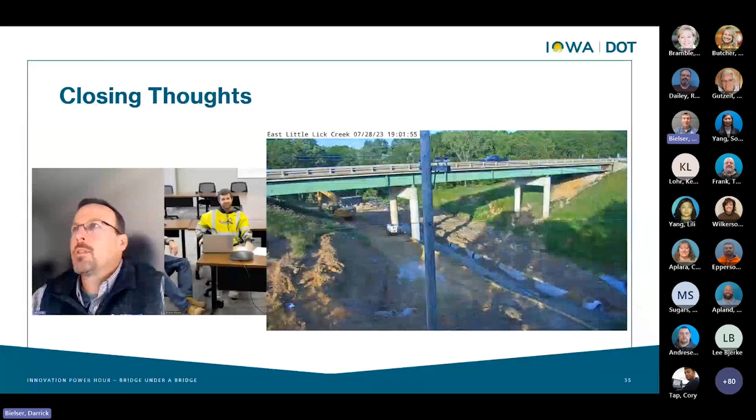No, appreciate the opportunity to talk about it too, Darrick. It's been a fun job. We knew it would be tough, but we're glad we got the opportunity to do it. It'll be a nice showcase when it's all said and done, and hopefully achieve the goals the state was looking for at the start, given the challenges with the detour and everything.

It's easy to look at a job like this from the innocent bystander standpoint and say, why didn't they just do a detour through it? I'm sure if it were that easy, it would have been decided up front. That's a pretty big deal to have a bridge of that span and height replaced without shutting it down -- I don't know if that's a season or a season and a half of work for something like that. I'm not a bridge guy, but to be able to keep the road open, that's pretty neat to be able to say.

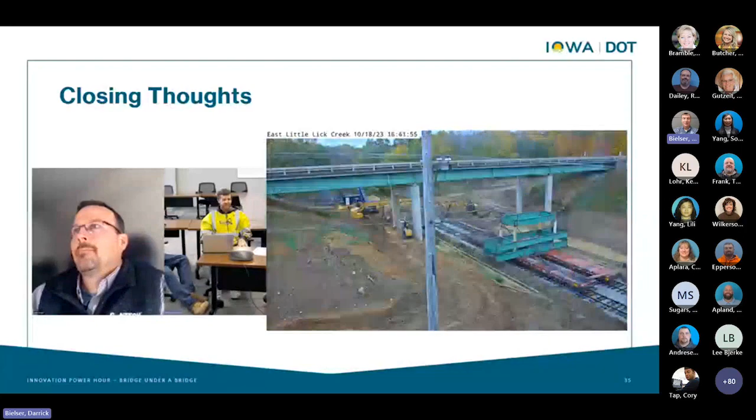It's always really complicated to explain to someone what you're doing. They're like, so are you taking the bridge out then? No, we're not taking the bridge out. What do you mean? Never mind, I'll just show you some pictures. I'm sure the motoring public -- I don't know how many ADT that was -- but I'm sure they appreciated not having to go way around for a long amount of time.

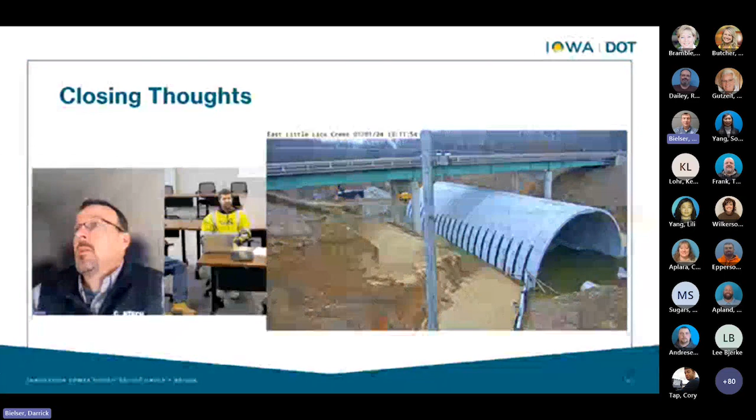This is one of a kind. I know as a company, we have not done a twin leaf under any bridge in the entire United States, so this will be a first of its kind. Obviously we've done plenty of open cuts with two leaves, but never underneath an existing bridge that stayed open the whole time.

Okay, so we're going to open it up now for questions. Darrick, Hugh Holick had a question in the chat: how was the stream diversion handled during construction?

I have Travis Augustine here with me to help answer some of the questions. Travis, do you want to take that?

Yeah, so on the stream diversion, some of it was staging, and then some of it was putting in temporary pipe. That time lapse video at the end, you can see the pipe. So when we did the north footing first, we kind of crowded all the water to the south, and it worked out nice because we were digging in limestone. We would throw the dirt over, crowd the stream over, and then we could armor that stream with the limestone we were excavating.

There's probably anywhere from 4 to 6 foot of limestone, and we'd throw that right on the bank, so we just kind of crowded it over. Then when we got that footing done and backfilled, we ended up putting in probably 300 feet of 60-inch concrete pipe along that footing.